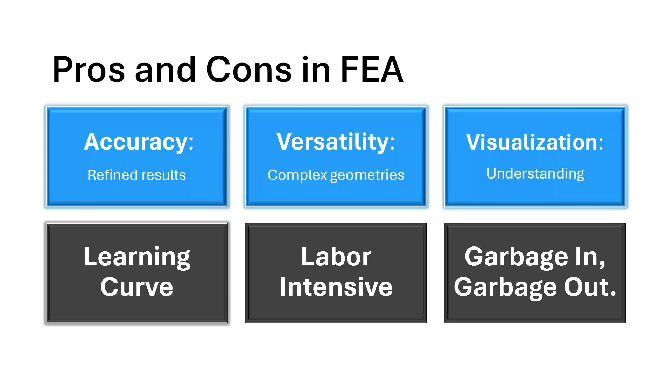Now, on the downside, inevitably, we're going to have to go through a steeper learning curve to learn how finite element analysis is done differently from the traditional line girder analysis. And creating a model is going to be more labor intensive, sometimes way more labor intensive. The results can only be as good as the input. So today, hopefully, I can convince you that if you develop something for yourself, you can alleviate labor intensivity issues. At the same time, because we're automating a lot more things, human errors can be reduced and controlled.

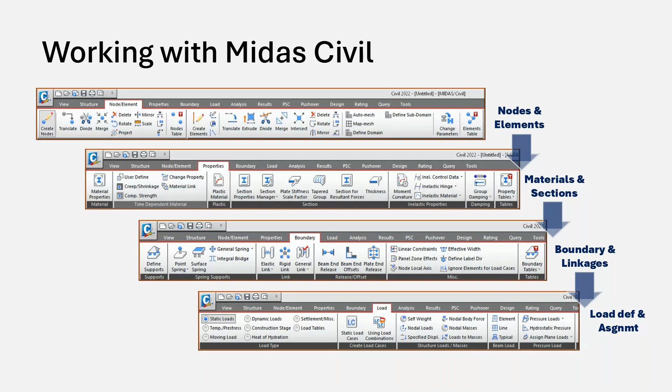Midas Civil offers a wide range of capacities and flexibilities. Using these four control bars, you can pretty much create anything you want. Now, inevitably, that brings us a steeper learning curve, especially for the users. So a lot of times the new user will just turn straight to this structural wizard tab.

And my message is that the structural wizards are great, but they're not a perfect cheat code to avoid learning curves. It can be beneficial if we want to create quick models and perform some parametric studies, no doubt about that. But we have to realize that the wizards have their own learning curves. It sometimes hinders your growth as a finite element modeler. And lastly, it is not tailored for your individual needs. Let me elaborate the last point a little bit more.

So for me, for better efficiency, 95% of my bridges are going to be done in a line girder model. So I will not choose Midas Civil because of the speed. But I am only here because I have a bridge that is geometrically irregular. And we also have to notice that these structural wizards are designed for standard and routine structures. So it becomes hard for me to find a use case to use these wizards.

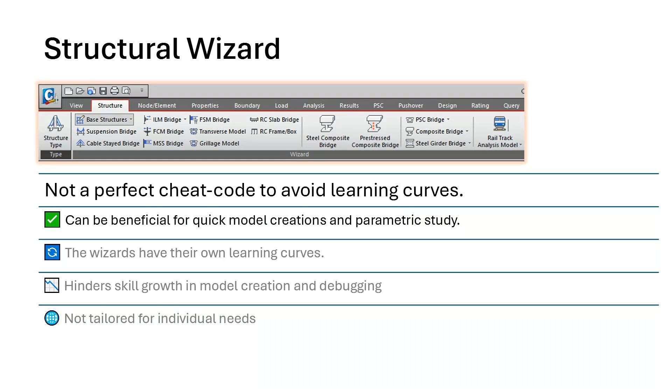An alternative solution is to design something yourself, right? So if we're able to develop our own applications, we're able to customize the flexibilities to include the flexibilities that we actually need. For the flexibility that we don't need, we're going to automate them all. And it also allows me to include additional functionalities that's not originally within Midas Civil. I can also make quick adjustments throughout the project cycles.

And lastly, creating an application yourself, it really forces you to learn the basics a lot better. And at the same time, it allows you to repeat the basics in a programmable way. So it's really good for your growth.

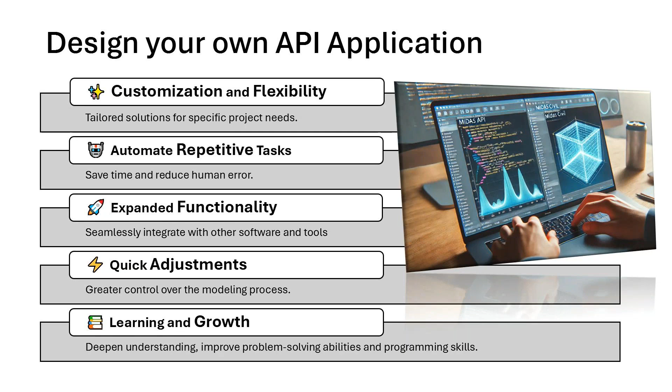So let me just take a quick moment to play this video. In this video, I will be creating a 7-span structure with some geometric irregularities. I will also complete the preliminary beam design with the API functions. So on the right-hand side, it's the program that I created. On the left-hand side, that's Midas.

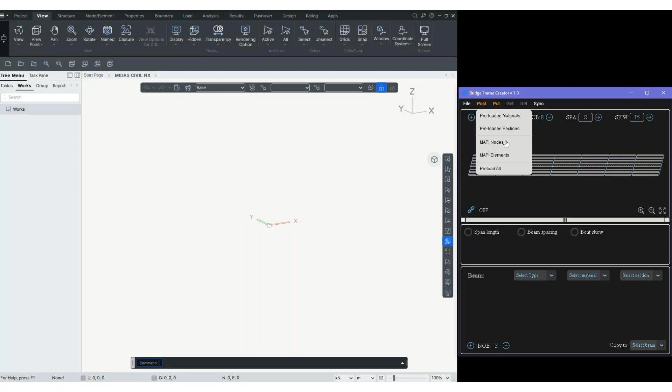So we're creating a 7-span structure with 8 beams, typical beam spacing of 8, and the skew angle of 15. So everything is done. We're going to push everything to Midas Civil directly with one click. So as you can see, material properties and sections are being created, as well as the nodes and elements.

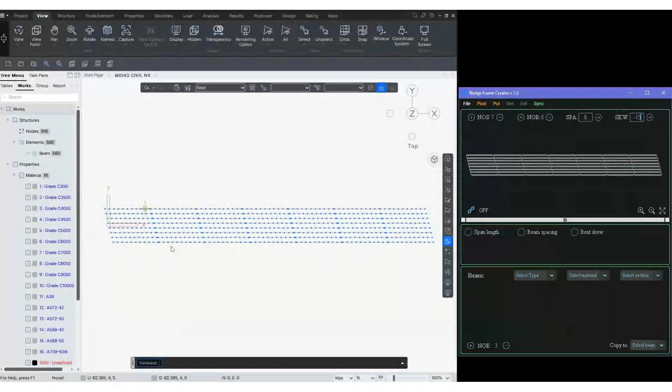All right. We're going to turn the synchronization on. So from now on, everything that I do on the right-hand side is immediately completed on the left-hand side also. All right. We can toggle the beam continuity with one button click. And we're going to customize span 2 to be 125 foot instead of the default 80 foot.

For some additional flexibility, we're going to turn some bents to be not completely parallel to each other. Bent 5, bent 6, and also bent 7 will have a different skew.

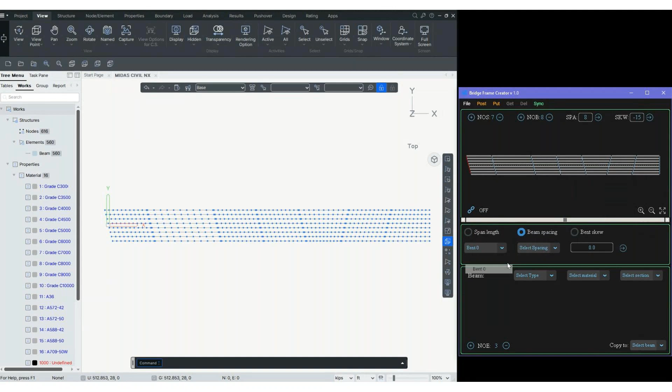All right, now let's put some flares into these beams. For bent number 0, spacing 0, I'm going to make it 14 foot. So you can see the exterior beam flares up, and the same thing will be completed for the lower beams. All right. So for the end bent, I'm going to change the spacing to a uniform 11 foot, so it has a uniform flare.

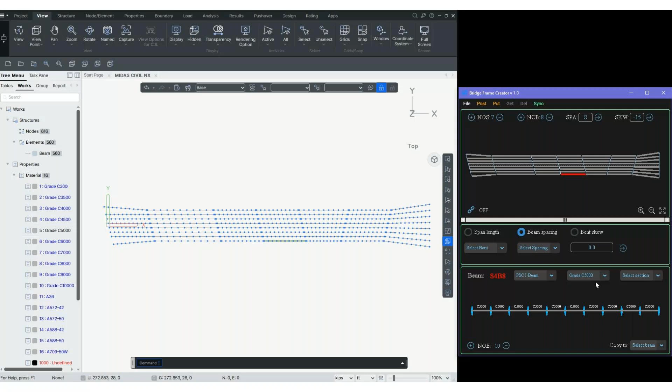We're going to do some beam designs, just picking one of the most typical 80-foot spans, assigning it to 5,000 PSI concrete, and we're going to use the AASHTO Type 3 for that beam. So you see it's completed. To save us time, we can copy this beam design to the rest of the beams because I know a lot of the situations fall into this category.

All right. So I know that in span 2 it's not going to work. I'm going to change the concrete to 8,000 PSI as well as the beam shape to bulb T63. Okay, I'm going to change some design settings to make those sections show different colors. Okay. Copying that beam we just designed to the same span. So span 2 can have all bulb T63 with 8,000 PSI concrete.

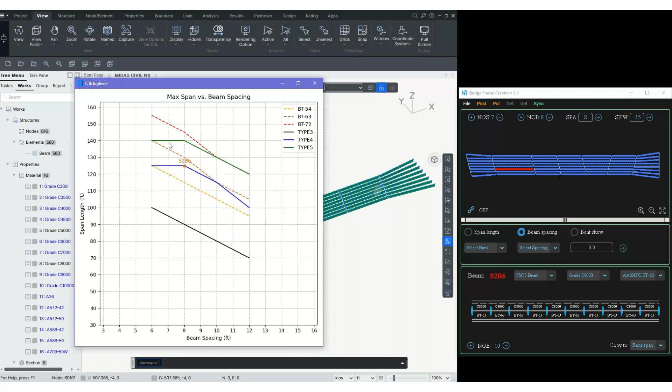All right. We're going to perform some preliminary checks. You can see that the dots are falling underneath that design curve. So we're good there. We're going to check the same thing on some of the weird spans. So beam length varies. So you see there's a deficiency there. And for the end span, it's a little bit short. So we're going to change those designs to some beefier beam shapes.

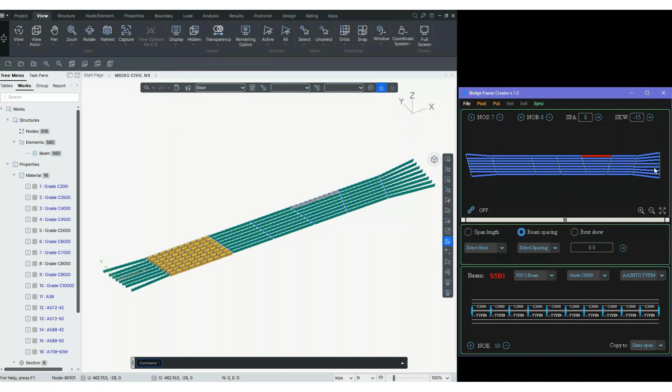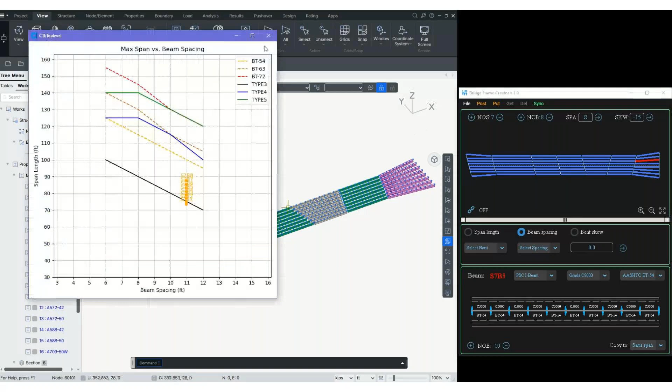So for span number 4, we're going to do, what did we do? Let me see. We did AASHTO Type 4 beams. I believe I chose a different beam shape for the last span. So that's bulb T54. Okay, so that's now all completed. We're going to recheck the designs for the current spans. Okay, much better, much better.

So now we're going to focus on beam 1 in span number 2. All right. So the API gives me the flexibility to move the nodes to the location that I want them to be. So in this case, I wanted to create a node at shear critical locations. So I could drag that node over, and by specifying the element length, I can pinpoint that node location as soon as I click OK.

You see the same thing is done in Midas Civil side. We're going to move the end node to 95% of the span, and it's completed. So this view also allows us to give different sections to each meshed element. Not that we need it for pre-stressed concrete, just kind of showing the capabilities there. We can also modify the whole beam. And I'm going to put the beam back to its original shape.

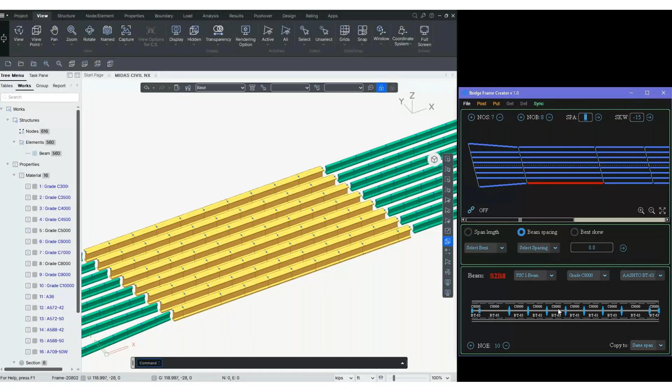All right, so the bridge framing is pretty much completed there. So first, let's get rid of the definitions first. An API, in layman's terms, is something that you create to bring in a few different softwares and let them talk to each other. And a REST API allows you to send commands over HTTP to the server, okay? And there are 4 standard methods within the REST API, which are get, post, put, and delete. You can get information, you can post new information, you can update existing information, and you can delete information.

Now, what I want to stress about this is that the REST API request is stateless and independent. What does that mean? Servers will not save any of the previous requests you send to it. Therefore, each REST API request has to be independent, and it has to contain all necessary information for you to complete those requests. Okay.

All right. So on the right-hand side of your screen, it shows you the folder structure of my program. In the root folder, I have a main program, which is responsible for the graphical user interface. I've also injected personalized functions and tools for me to use. The MAPI class, which is imported into the main function, is responsible for connecting with the server and sending API requests. It also includes some basic functionalities for modeling, such as creating a section or creating a node, which can be used in the main class. There are a few section classes to handle different beam types, such as prestressed concrete, reinforced, and steel I-beams.

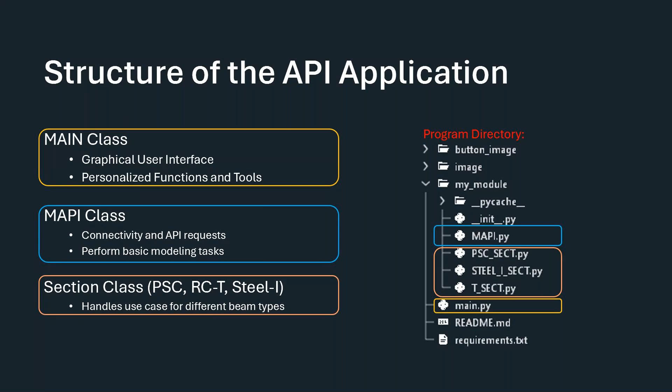So this is the flow chart. This program first takes its user input and processes it. The user input is going to be generic, basically how many spans, span length, beam spacing, and so forth. It's going to take that generic information, massage it, and then create something called a beam matrix. This variable is in JSON format. It directly controls 4 different JSONs for materials, sections, nodes, and elements.

Okay. And then once any change is made, it's going to use the REST API functionality that's developed by Midas Civil, through the server and directly to your control panel. So realize that you can be doing this at a distance. It doesn't have to be your computer. You can be controlling somebody else's computer using these API functionalities too.

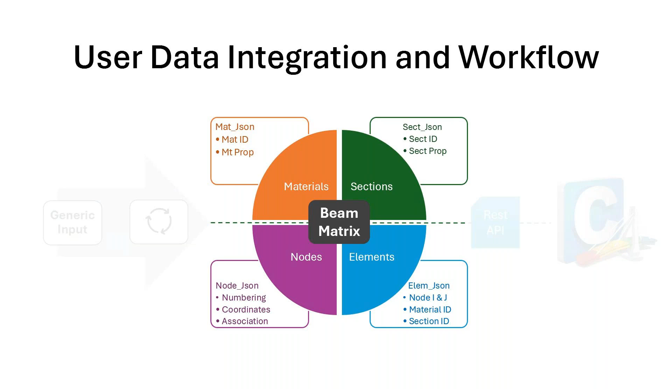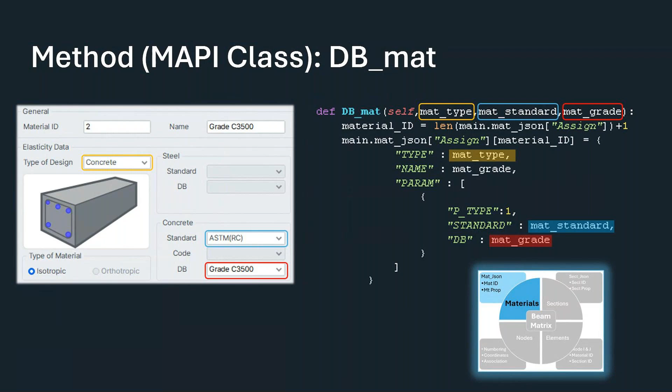So we're going to focus on this beam matrix today. I'm going to use this as an icon or indicator to show the progress. Firstly, creating a material. That's the most fundamental task we're going to have to do modeling a bridge. On the left-hand side, it shows you how it's done in Midas Civil. There are 3 main inputs: the material type, which is concrete, the standard, as well as the strength. On the right-hand side, there is a user-defined function. Actually, this should be called a method. When a function is sitting underneath a class, it is called a method. This method takes those 3 inputs and creates this mat JSON, which is mentioned in this matrix right here, updates it, and then it will later be used in the API request to change things in your Midas control box.

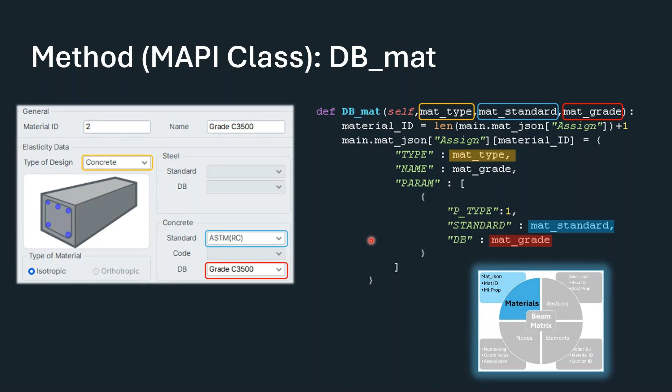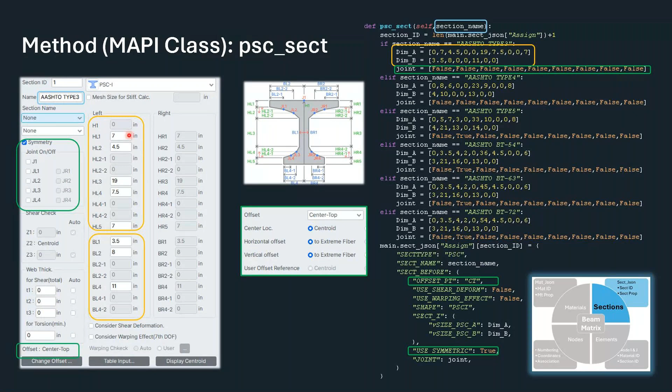Very similar, this is how you create a section. In this example, we're going to be creating AASHTO Type 3 beams. You can see the inputs right here, and the same input is being used in this method. Now, these if statements are going to try to match this user input with these pre-existing beam shapes. So in this case, let's say AASHTO Type 3. And then these dimensions on the left-hand side are pre-stored in these lists, so they can be directly used. Joints on and off, user-defined symmetries, as well as the user-defined offset can also be controlled here. Basically, anything that shows up on your screen, if you want that flexibility, you can bring that in.

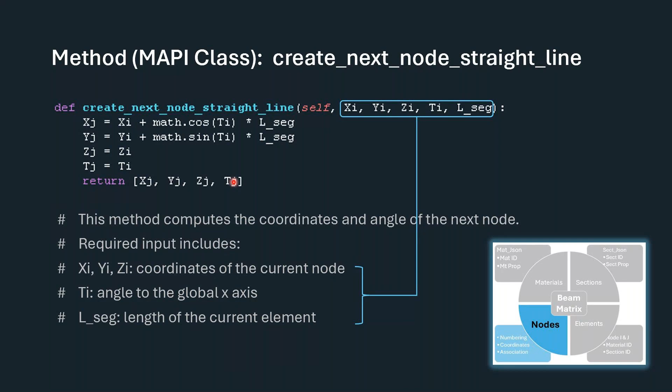All right, now we move on to creating nodes and elements. This is going to be a little bit more complex, so what I do is divide and conquer. We're going to first look at how you can create a single node. This method under the MAPI class creates a single node using the information of the previous node. To get the input, x, y, and z are the coordinates of the previous node, T is the angle, and L segment is the element length. Using basic equations, you can return the nodal information for the next node. Okay, so remember this function, create next node on a straight line.

In this next method, the method we just talked about gets used within a loop. What this method does is create all the nodal locations within a single beam. It could be any beam. The information collected will then be used to update the node JSON for the API request. As I mentioned, the beam matrix that controls everything always gets updated anytime I make a change or create something.

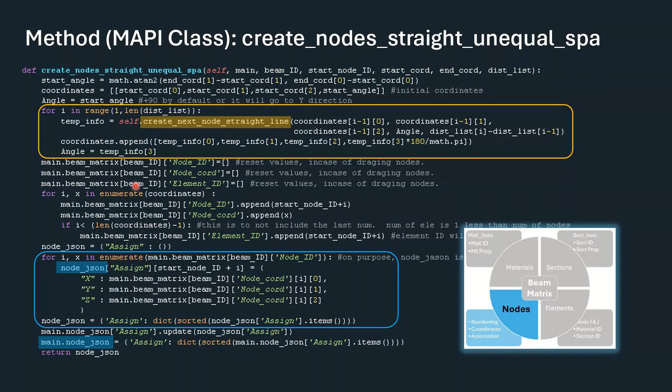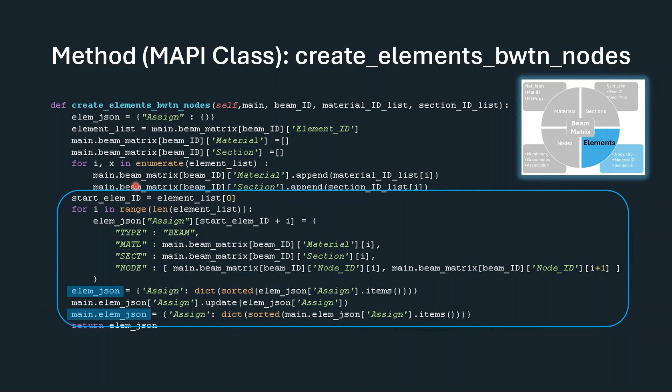For element creation, we simply connect the consecutive nodes to make those elements. Those are relatively easy. However, we're going to have to deal with every element's material ID and section IDs. It gets a little bit complex when the beam is non-prismatic, but in this case, for pre-stressed concrete beams, we don't have to worry about that.

Remember the previous 2 methods we just did, creating nodes and elements for a single beam. Now they get used in another layer of loops. Now this is the 3rd layer. The purpose of that is to create all of the beams within the bridge. For instance, if we have a 3-span bridge and each span has 5 beams, we're going to be running those methods 15 times.

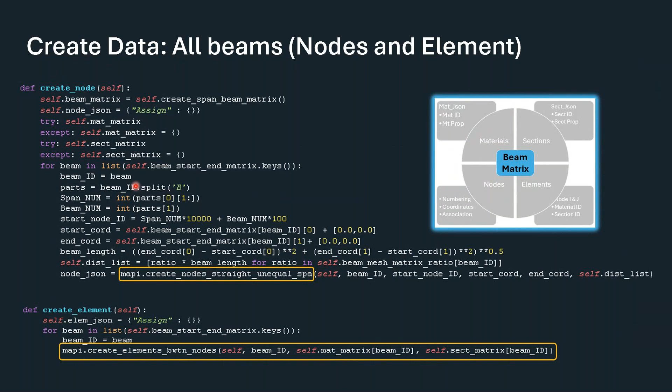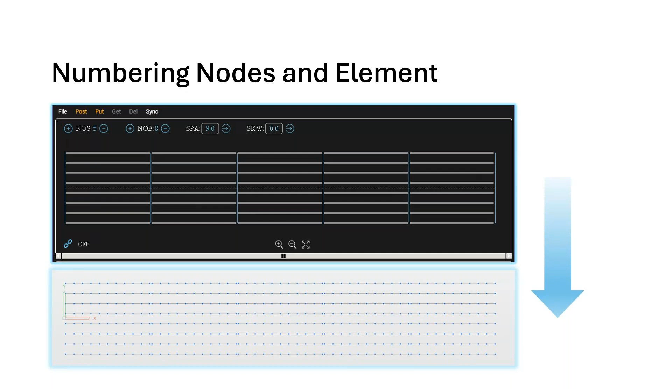My goal is not only to automate a bridge model, but also remain in control for me to make changes to refine the bridge geometries. Or if the roadway people want me to change it, I can easily change it. So I'm doing that through the accurate numbering of nodes and elements. So let me show you. We're going to take a random example. Here's a 5-span structure. There is a zoomed in picture in Midas Civil for span number 5.

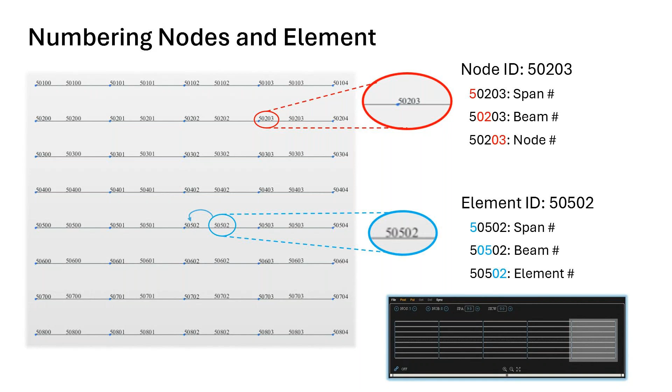If I simply select a random node, this nodal ID is 50203. It's span number 5, the second beam, and node number 03. Similarly, element numbers are named the same way. In this case, I just simply took the beginning node to name this element. To name a beam, on the green box, I simply used S5B8. That stands for span 5, beam 8. So at any given time, if I wanted to change any beams, every node included, every element included can be directly in control.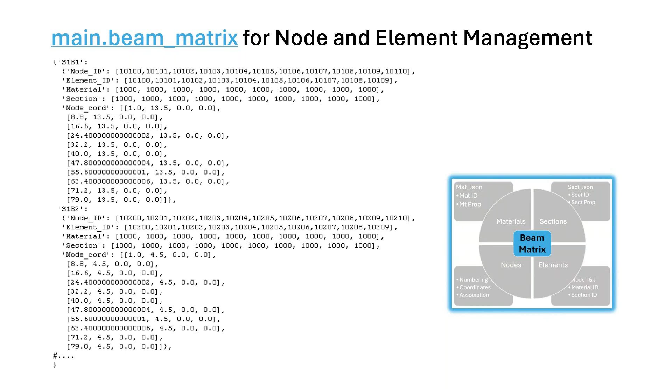All right, so after that MAPI class, finally we get to this main class. I'm not able to explain every single detail of this because it gets too long. But what I can say is that this is where you will leverage your engineering experiences, programming skills, and everything that you have to create something for yourself and your team.

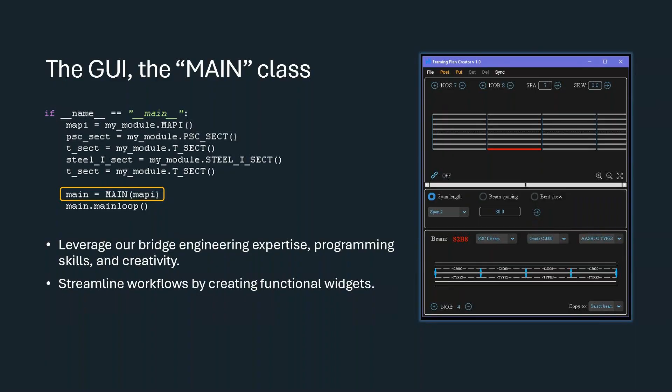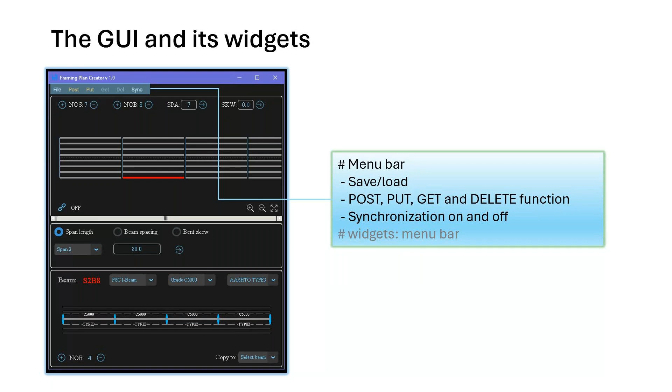I'm going to quickly go through the program that I created. I have a menu bar that can save and load models. It can perform REST API requests. When the synchronization button is on, you are basically doing two things at the same time. This first control bar allows the user to set a basic geometry or framing plan for the bridge. This drawing canvas shows the current bridge framing plan. It shows you the selection of the span, the beam, and the bent.

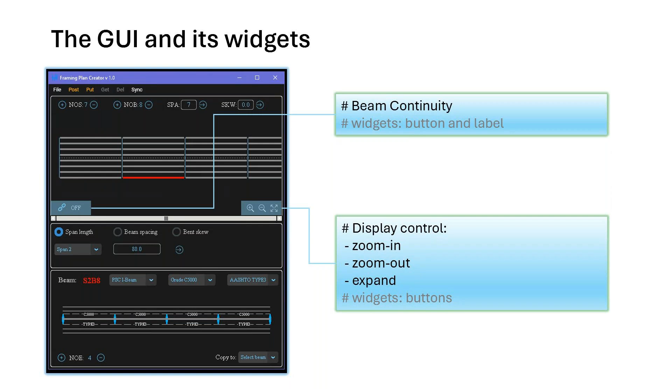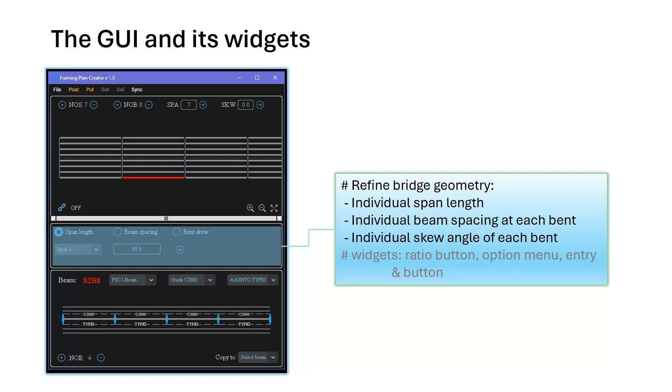The button on the lower left allows you to toggle the beam continuities. On the right, it is simply zoom control. The second toolbox allows you to refine the bridge geometries, setting individual span length, beam spacings, flares, or different skews for each bent to satisfy my regular needs for bridge modeling.

This control bar allows you to design a beam, and the design beam profile is shown here. It does give you a visual in terms of what materials are on it and what sections are on it, how many elements, and you can drag those nodes to a different location. User can set the number of elements for any beam on the lower left and copy the current design to any other beam or to any other group of beams. That's just going to be a time saver there.

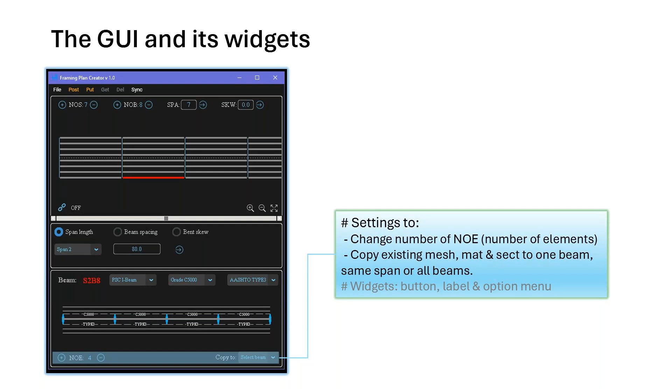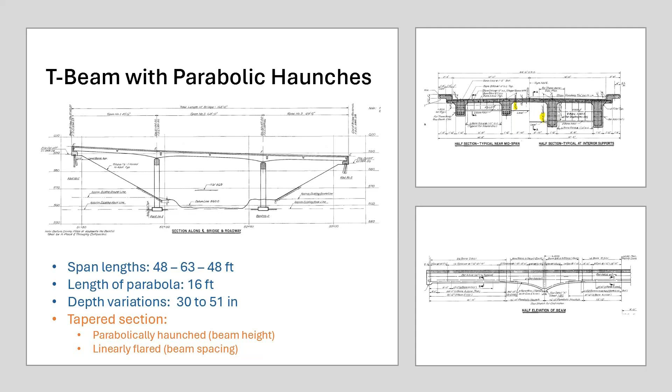A brief overview of this bridge: 3-span, 48, 63, 48. The length of the parabola is 16 foot. It is 25% of the middle span and 33% of the end spans. The beam depth varies between 30 inches to 51 inches. Okay. So this time I'm just going to go straight to posting the default 3 spans.

We're going to change span 1 to 48 foot. Once that's done, I can push an API request to Midas Civil to change those nodal locations. Okay, and we're going to turn the synchronization on from this point, changing span number 3 to also 48 foot. Span number 2, 63 foot.

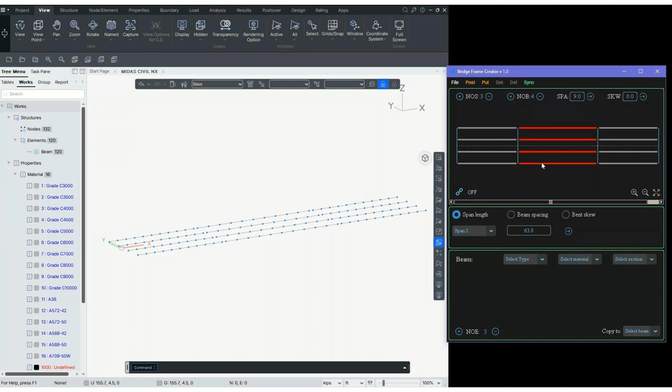All right, we're going to design some beams. We're going to start with the middle span, symmetrical haunch. So first, it allows us to define the min sections, meaning the shallowest beam section, which is 30 inches, 8-inch deck, and 18-inch bottom stem. For the max, everything else is the same. The beam depth becomes 51 inches.

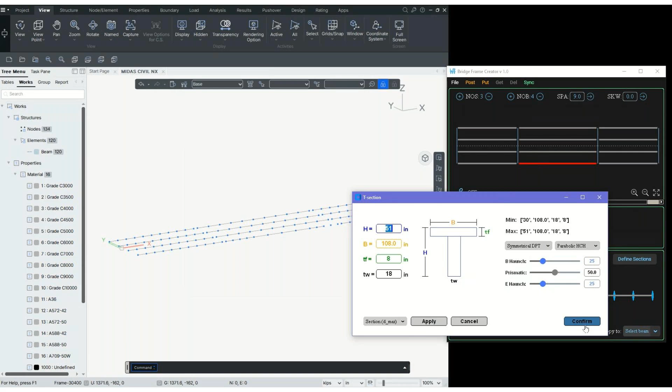All right, we're going to call this a symmetrical haunch, parabolic variations, and we're going to set the length of the parabola using percentages. So 25 and 25. The middle portion is calculated automatically. So as soon as we push confirm, you can see that haunched beam shape is being created in Midas Civil. I'm going to scroll down to the automated tapered sections. As I'm clicking through, you can see where those sections are being used on your model view.

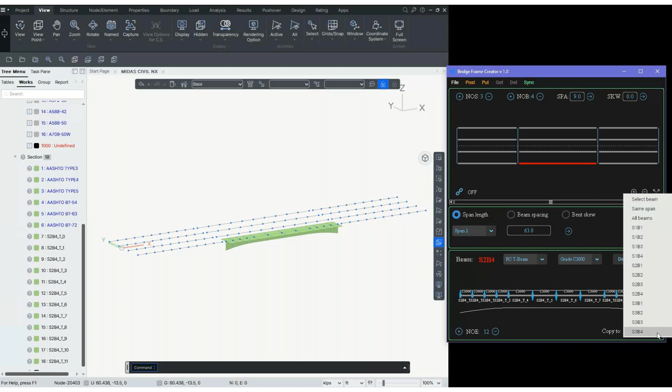All right, we're going to do the end spans. Actually, I forgot about the material. We're going to do the 3 KSI concrete and then copy this to the rest of the beams within the same span. Okay, end spans. Everything is the same. The program remembers your previous sections, so we're good there. We're going to call this an increasing haunch, parabolic shape, 33% haunched area.

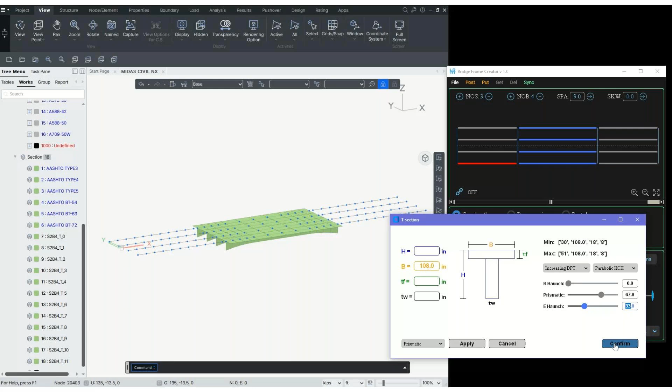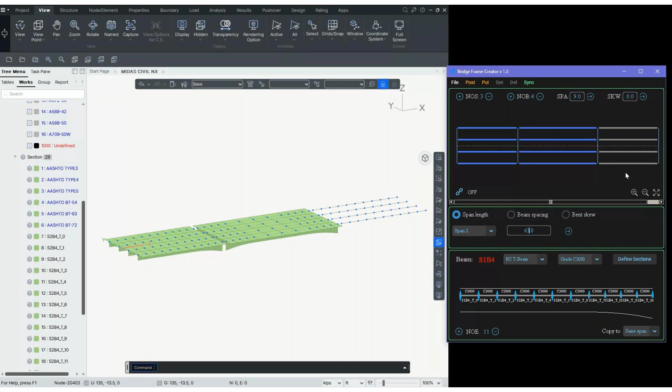It's working in Midas and then creates that beam. Okay, copying that beam to the rest of the beams in the span. Now it gives me a reminder with that yellow color because I forgot about the material. All right, so I'm going to check where 3000 psi concrete is being used in Midas real quick to make sure everything is accurate. As you see, the first 2 spans are all in that material.

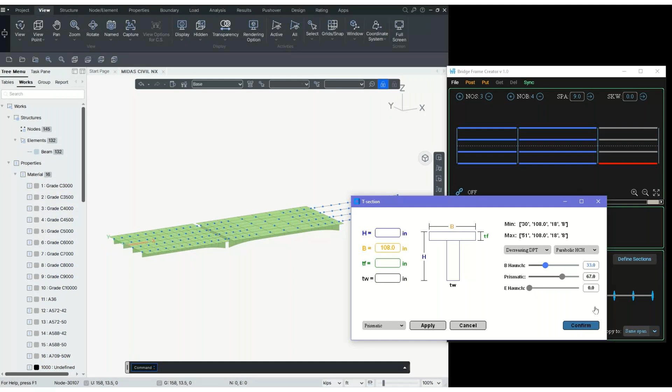All right, so the last span, this time same dimensions, but we're going to use a decreasing depth. Parabola, 33%, so we're good to go there. Putting in a material and copying that beam. Okay. I can close the gap by toggling the continuity button. So now it's 3-span continuous.

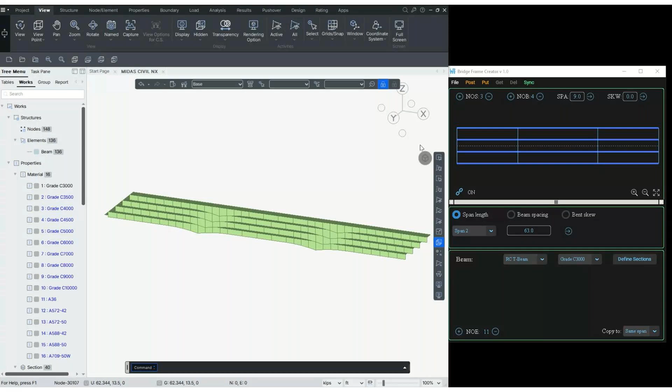Now here's the question. What if span number 3 has a flare? Realizing that the tapered shape has 2 different dimensions that need to be tapered. So I'm going to first change the geometry to a flared shape for the end span. And now you can see that the top flange width no longer satisfies the tributary width. So we're going to design that one more time with the same steps.

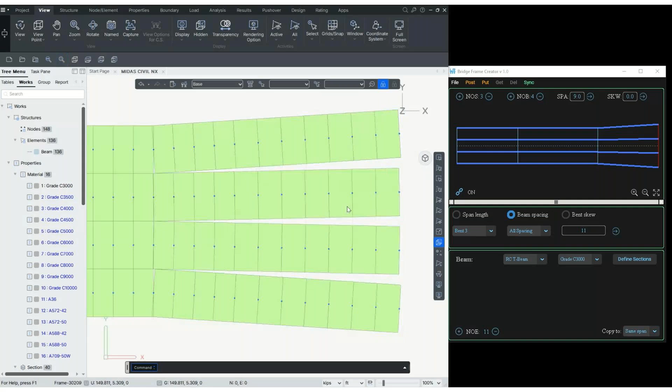So this time I'm opening up this window. You can see that the B dimension shows it varies. The program realized that the spacing is varying, and we really don't need to do anything there because the computer already has all the information. We're just going to say decreasing depth, parabolic shape, and simply click confirm.

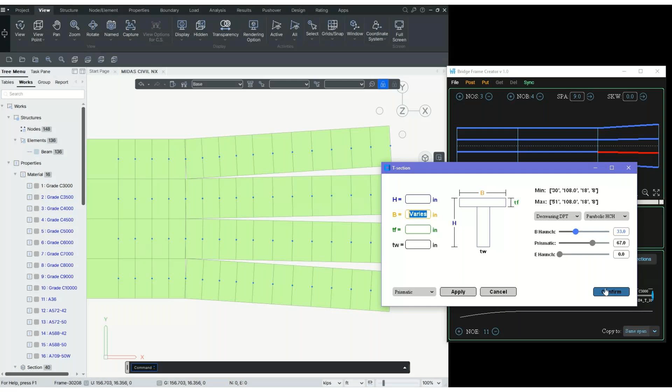If I copy that beam design to the rest of the beams in that span, you will see that the space gets filled up. But again, I forgot about the material, so it's showing me that. I'm going to put that in real quick, and we'll be done with this model.

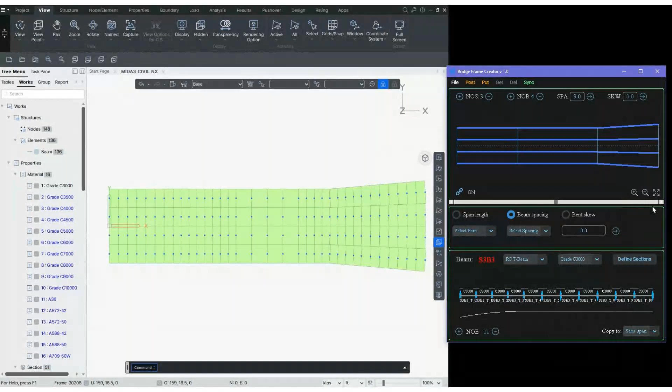All right. So let me quickly recap what we have done today. The personalized or user-defined API applications are going to allow you to customize your own modeling procedures to include only the flexibility that you desire. If you don't need the flexibility, you will have the choice of automating them all. And certainly it's going to be an efficiency booster.

It allows you to remain in control of the modeling to make real-time updates without having to redo the model. And lastly, it's going to be user friendly. Why is that? Because you designed this thing, you can make it as user friendly as possible.

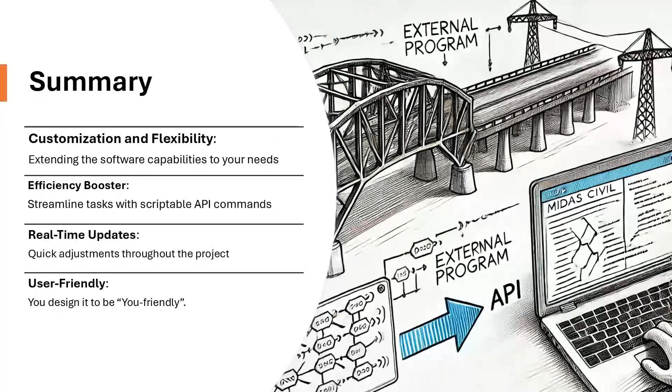Now, I really wanted to stress this point. Throughout the development of the application, you're going to be constantly battling these two things. On one side, it's the simplification, and the other side is the control flexibilities. If we increase simplifications, consciously or sometimes unconsciously, we are losing control flexibilities.

So, what I recommend all of us do is that before we start developing this program, we well define our objectives and have a distinctive list of the flexibility you would like you and your team to have. And use that as a reminder throughout the development that you do not want to oversimplify things and lose those crucial control flexibilities.

All right, so before I close, here are some of the future tasks I can think of. Of course, I can put in complex bridge alignments, putting this bridge on a curve. I can include more bridge types. I can add features to include other bridge components. I can add features to apply common load definitions, load cases, and load combinations. And the last thing I would do is networking with other professionals and developers, basically grow as a community and learn from each other.

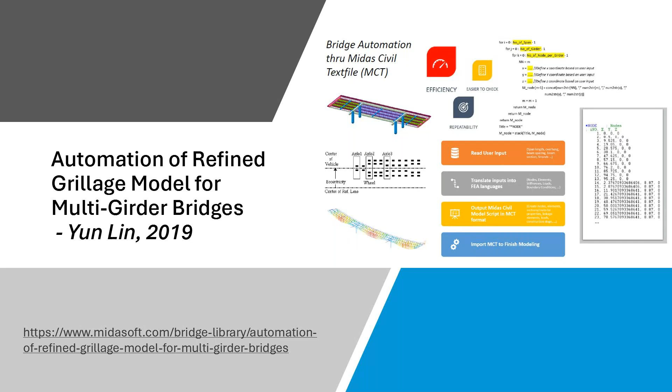Now, I want to mention this webinar as well. It was in 2019. So this is another method you could automate your bridge models, but this time without the assistance of API. So if you don't have the NX version, a lot of the similar things can be done, but in a different way. So just to be very brief, the way it's done is basically reverse engineering the modeling process. We start out by understanding the script file and then write computer code to automate the script file. That's the way we're automating the models. And the script file can be directly loaded by Midas Civil.

So what is lacking in comparison to API is that sometimes to make changes, it's going to be a little rough. So it's good for creating models similar to the structural wizards, but to make changes, it's not as good as API applications.

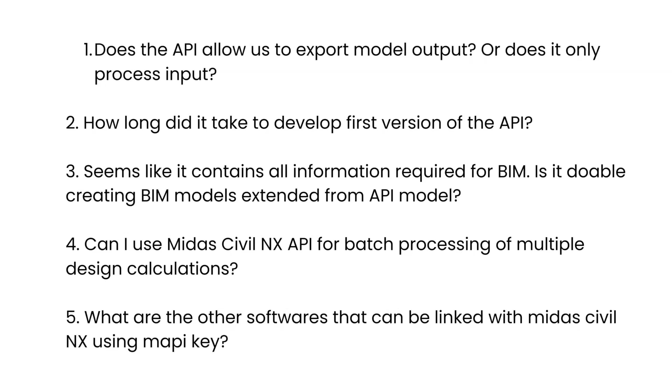I think question number 1 we already touched. To put it in the simplest form, basically anything you can do in Midas Civil, you can do it using the API. Everything is possible. The first version, how long does it take? It's a tricky question. It depends on your level of skill. Mine is not very good, but depending on how fluent your programming skills are, you can develop them faster or slower.

But what I'm going to encourage you to do is make a very simple program. It could be defining a single material in Midas Civil, creating a single section, a single node, a single element. As soon as you see one command being pushed in Midas Civil, that's really going to be a huge confidence booster. After you see that happening, you realize that the only thing that's going to limit you is your imagination. So go from there. Just do something very simple, and we can build complex stuff on top of it.

Number 3, same answer I provided before. Different programs can be brought into this. If you would like to keep information of the model, I think it's a really good idea, by the way. It can be done. It can actually be easily done.

Batch processing, that one I am actually not sure. The way I can think of is to queue them up and do it one by one. Batch processing in parallel, I don't know. Maybe Beta can answer that question better.